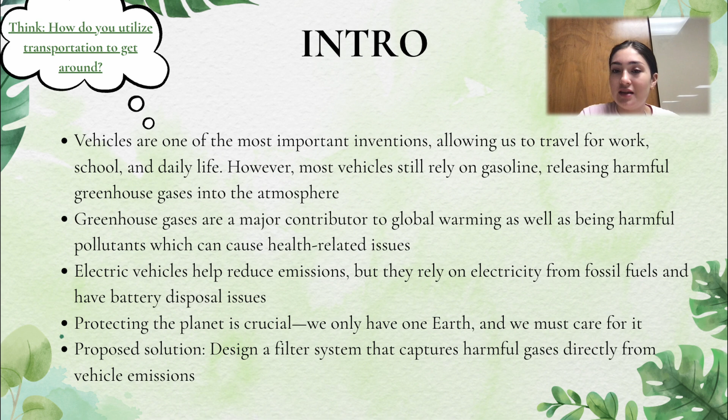Electric vehicles have been introduced to help solve this issue, as a cleaner alternative since they don't produce tailpipe emissions, but they still have drawbacks. The electricity they use often comes from fossil fuel based sources, and their batteries are often difficult to dispose of safely and sustainably. This makes it clear that while we rely on vehicles, their environmental impact is still a serious concern, which is why we propose a new solution: filters that can be added to vehicles to reduce the harmful gases they emit. This innovation could help us take a step forward in protecting the only planet that we have.

Now we are going to talk about the problem. While researching for the project, I found that one of the biggest problems is vehicle emission. Vehicle emission releases some of the most harmful pollutants in the air. These pollutants are not only damaging the environment, they also have a serious impact on public health. The problem is getting worse day by day because of poor fuel combustion, outdated filters, limited filtration surface area, and a lack of real-time maintenance alerts.

Because of harmful gases like carbon monoxide, nitrogen oxide, and many other particles, they're harmful for the environment, they're released into the environment, and no one seems to care. This is worst for the environment and for every human being, but no one literally cares, to be honest. These things lead to breathing problems, heart issues, and overall worse air quality. That's why me and Alyssa decided to focus on a solution that can directly help and improve air quality. We want to create a filter system that reduces pollutant exposure, so that public health will be safer.

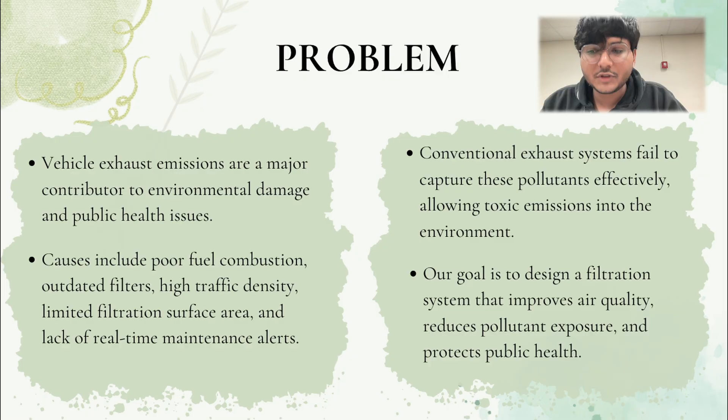Here are some problems with our current solutions. First, we have electric vehicles. While electric cars are often seen as an eco-friendly alternative to gas powered vehicles, they still have environmental drawbacks. One major concern is the production of their batteries, these batteries require rare metals like lithium and cobalt.

Mining these metals is not only resource intensive but also dangerous, especially in areas where miners work without proper safety gear. Additionally, building an electric vehicle produces about the same amount of CO2 as a gas powered one. On top of that, you have to factor in the emissions from making the battery, which is also very dangerous. And while electric vehicles themselves don't release emissions while driving, they still rely on electricity, which often comes from fossil fuels like coal or natural gas.

This means that electric cars are only as green as the energy they're charged from. If electricity comes from renewable sources like solar panels, they're a much better option. Not all people have them though, so the environmental benefit can be very limited.

Second is utilizing walking and biking. While they're often viewed as great alternatives to driving, particularly for shorter trips, they're affordable, reduce pollution, and help improve physical health. For shorter distances, whether commuting to work, school, or grabbing groceries, walking and biking could be efficient. However, for longer distances, traveling with children, walking and biking can be a lot less practical or feasible. It's also less comfortable for families with small children and carrying lots of items, or for those with limited physical mobility.

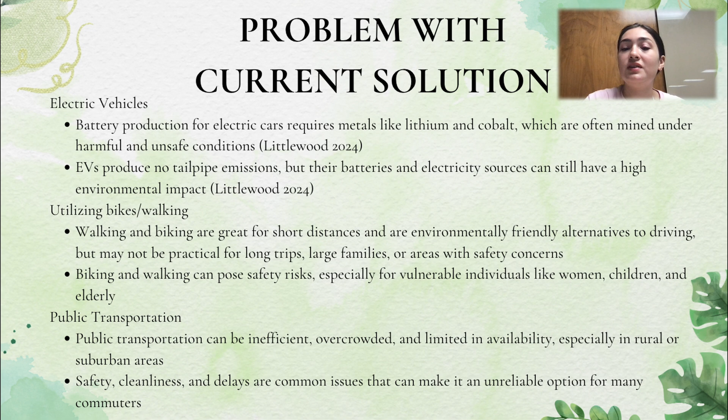Additionally, issues like safety, cleanliness, and frequent delays can make public transportation a lot less appealing. People may feel uncomfortable or unsafe, particularly during later hours or in poorly maintained vehicles. These issues can reduce the effectiveness of public transportation as a viable solution for many commuters.

Our main goal is to reduce the pollution that comes directly from vehicles. We are making a small filter that is inspired by how lungs work. This filter has different kinds of layers that can catch, capture, and chemically trap harmful gases to clean them. We are also going to add a self-cleaning system and a sensor. This helps the filter last longer and ensures it works properly. Our design is small, easy to install, and works with most cars. By using ideas from nature, we are making sure we can clean the air in a smart way.

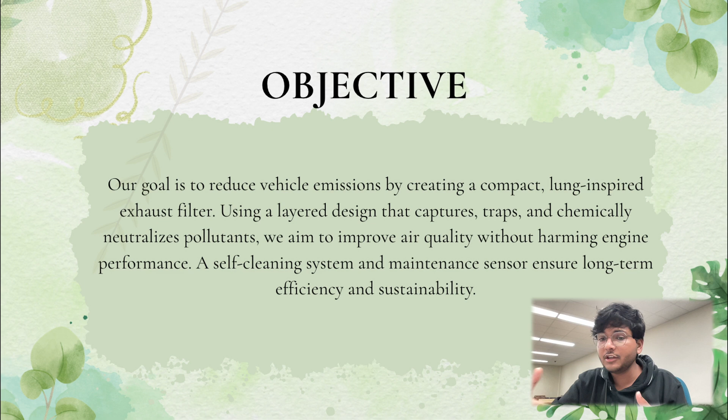The biological questions we're going to be considering when researching this project are: How does nature filter and remove harmful gases in the atmosphere? How does nature help organisms breathe clean air through their respiratory systems? And how does nature help to create clean air?

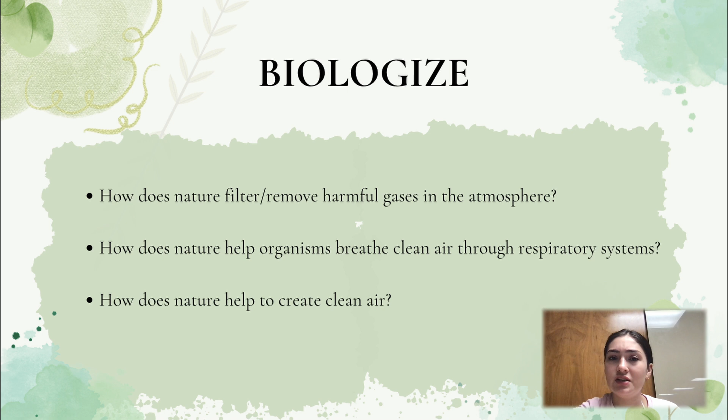For our second biological model, we chose mammal lungs because of their highly efficient natural air filtration process. Lungs clean incoming air in three important stages. First, nasal hairs at the entrance trap larger particles like dirt and dust to prevent them from entering deeper into the system. Second, inside the bronchial tubes, there are tiny hair-like structures called cilia, which move in coordinated waves to push mucus upward. This mucus traps finer pollutants and germs, carrying them out of the lungs either by coughing or swallowing. Finally, the clean air reaches the alveoli, tiny sacs where oxygen is absorbed into the body and carbon dioxide is removed.

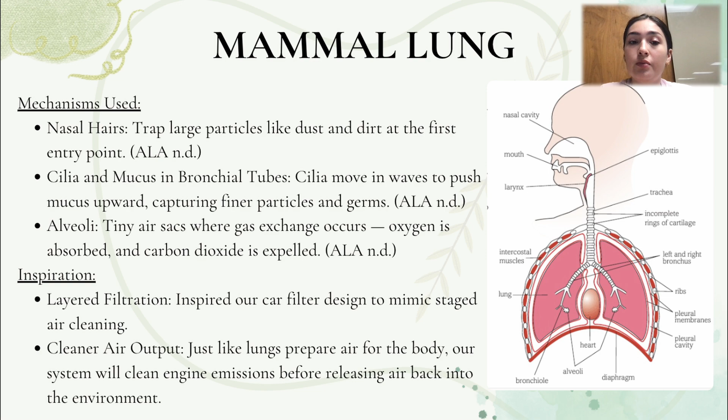We also took some inspiration from coral reefs. Corals are very good at slowing down water currents and trapping nutrients without blocking flow. In our design, when the car moves, a small plastic pellets rub inside a ceramic block. This rubbing creates static electricity, which helps us catch pollution particles that come from the exhaust. This system does not need any kind of power or fuel.

Also, the inside of the filter is made up of coral reef patterns. It has a special pattern that traps more pollutant particles without stopping the airflow. Because of the properties of the coral reef and its pattern, this helps us capture up to 93% of the particles, and 93% is a big number if we want to reduce pollution from vehicles.

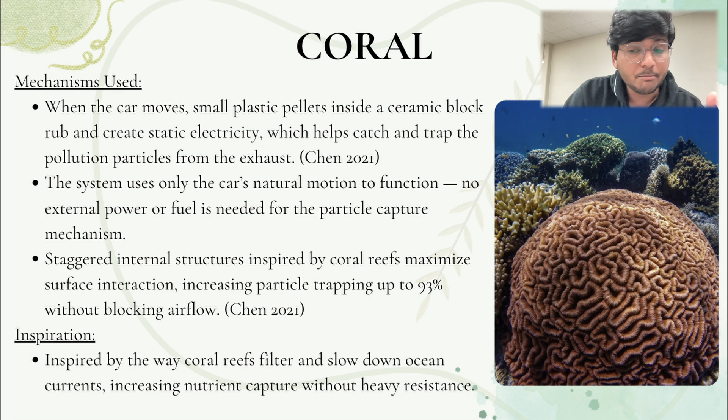For our abstract, we reframed biological strategies from mammal lungs and algae into an accessible and practical filter design. The goal was not just to mimic nature, but to create something easy for car owners to use without needing to replace their vehicles entirely.

We selected mammal lungs for their natural layered air filtration system, using nasal hairs, cilia, and alveoli to clean and exchange air efficiently. Algae were chosen as well because they naturally absorb carbon dioxide and harmful gases and produce cleaner air through their biological processes.

These models were a perfect fit for the problem of car emissions, which are a major cause of pollution in cities. Many people still heavily rely on gas powered vehicle systems, so we needed a solution that would work with existing systems instead of asking for major lifestyle changes.

We applied these ideas by creating a multi-stage modular filter that captures pollutants in layers and uses algae to biologically process exhaust gases. The final design is intended to be affordable, simple to install, and effective, helping provide cleaner air for everyone without forcing expensive changes like switching to electric vehicles.

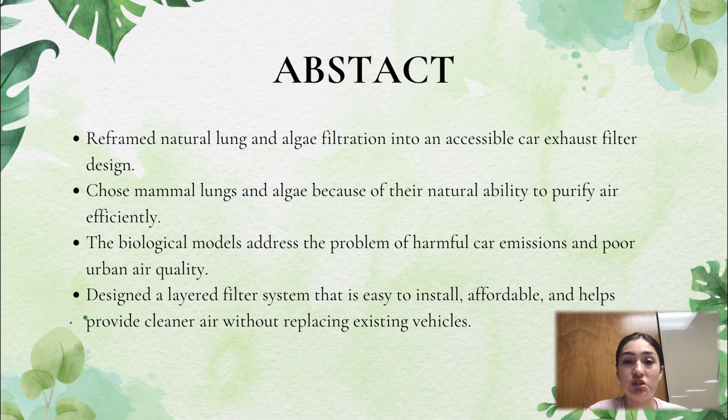After a lot of research, discussion, and debate with each other, we finally decided to choose this topic, the lung-inspired airflow system, for our final project. And I will tell you why we chose this topic for our final project.

This design copies how mammal lungs work. It uses a branching pattern to increase the surface area for filtration. At the same time, it keeps engine back pressure low, which is very important to maintaining good health and good performance for any vehicle.

Our filter uses a multi-layer system. First, it catches large particles, then it traps finer dust, and finally it cleans harmful gases like carbon monoxide, CO, and nitrogen oxide. We also added an algae based idea to promote natural gas exchange and make the system more eco-friendly.

As an engineering student, I can say that our system focuses on three key aspects: first is high filtration efficiency, second is low energy loss, and the third is easy integration into real vehicles. We made sure that this system will be compact, modular, and strong.

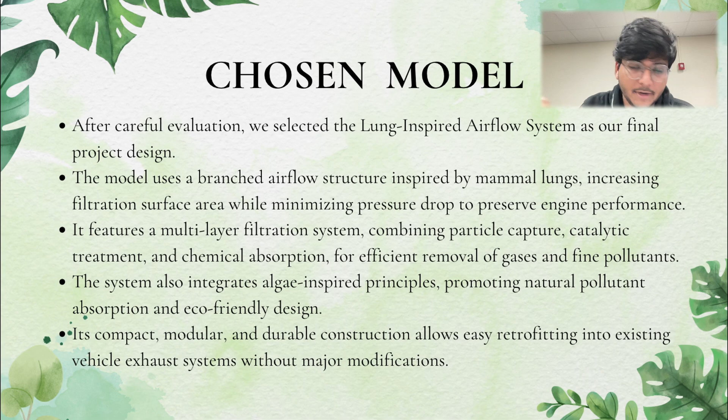The best thing about this project is it can easily fit into that old, previous exhaust system. They don't need to buy a new exhaust system. It's easy. They just have to put a filter into the exhaust system with a few small changes, and it will work out. For our model prototype 1, I designed a mammal lung inspired filter that focused on three biological stages: trapping large particles, removing finer pollutants, and chemically absorbing harmful gases.

While the filtration was effective, the first model had its challenges. It was bulky and hard to install on different types of vehicles, and needed too much space and extra adjustments on the system. After getting feedback, we worked on making the design slimmer, more modular, and allowing it to easily attach to a wider range of car exhausts without interfering with car performance.

We also decided to use lighter, more durable materials so the filter wouldn't weigh down or overwork the exhaust system. Another major upgrade we would add is self-cleaning features, like vibrations or air pulses inspired by how cilia naturally clean our lungs.

Additionally, we planned on enhancing our system by introducing algae tubes. These transparent tubes house algae that chemically consume the CO2, nitrogen oxide, and particulates, adding a second biological cleaning stage. The algae system is lightweight and can be visually monitored through clear tubing, making maintenance simple and encouraging continuous filtration. Overall, the project will hopefully evolve from a heavy-duty biological filter into a more compact, sustainable model that could realistically be adapted into cars today without harming vehicle function.

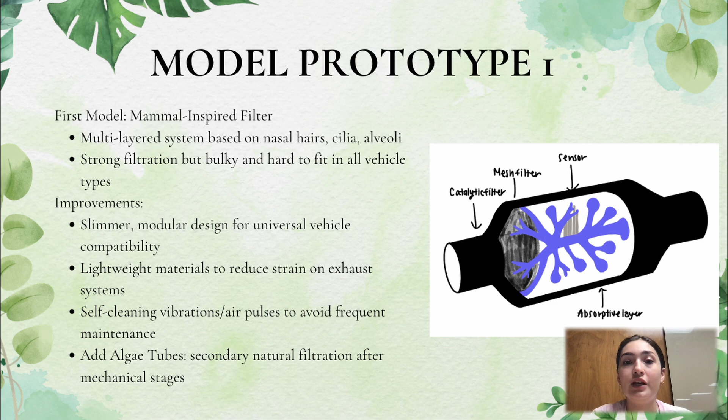It's my turn now. I will talk about model prototype 2. This design used a three-layer filtration system.

First, it catches big particles. Second, because of the catalyst layer, it helps break down harmful gases that come from the exhaust. Third, all the leftover pollutants and particles are captured by another layer.

To make it more advanced, we added a vibration motor. This motor gently shakes the system so it won't get clogged easily, helping keep it clean for a longer period of time.

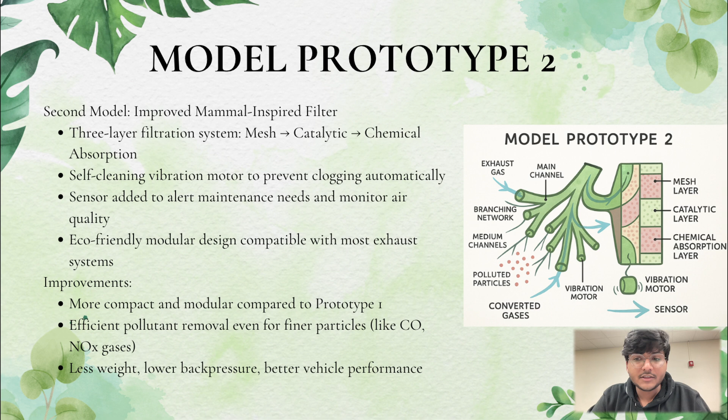We also added a sensor to check the air quality. Whenever air quality is bad for that exhaust system, the sensor notifies the owner of the car or vehicle. We also focused on making the design more compact, smarter, and better looking for the vehicle.

Now, for our final model, we created the Green Lung Filter, a bio-inspired exhaust system designed to reduce harmful vehicle emissions. It works by mimicking the natural filtration process of mammal lungs and an algae system.

First, the exhaust enters through a nasal hair-like layer that traps larger pollutants like dirt and soot. Then it moves into a cilia and mucus-inspired layer, which captures finer particles and toxic chemicals. Next, the gases pass through an alveoli-like structure, where harmful gases like carbon monoxide and nitrogen oxides are separated.

Finally, the exhaust moves into an algae culture section, where live algae absorb CO2 and nitrogen oxides, using them as nutrients and releasing cleaner air, mostly oxygen and other harmless byproducts.

This filter is designed to easily attach to existing exhaust pipes. It uses adjustable clamps and brackets that securely lock into place without requiring major modifications, making it universal for most cars, trucks, and SUVs.

In terms of manufacturing, the filter would use lightweight materials, heat-resistant plastics, and low-maintenance algae tubes. These are affordable, widely available materials that make mass production cost-effective while also being durable enough for real-world driving conditions.

Overall, the Green Lung Filter offers a practical and sustainable solution to help fight air pollution without forcing people to buy new vehicles or switch fuel types. It's a way to improve what people already have, helping both the environment and public health.

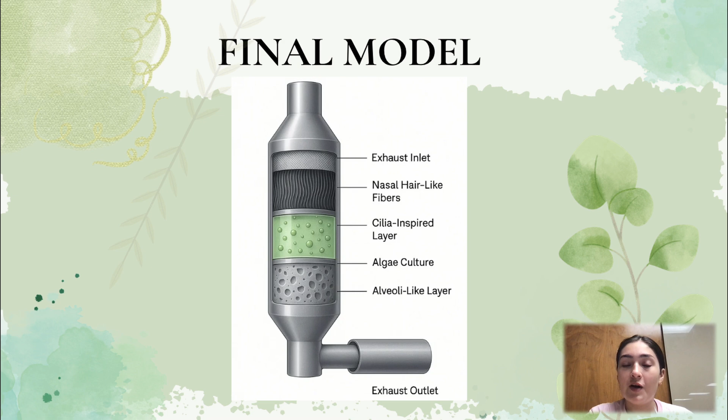Now I'm going to talk about problems and solutions: what problems we faced, what challenges we had doing that research, and what solutions we found.

The first problem we faced was that we needed some kind of system or prototype design that can fit into the exhaust without harming it or decreasing the performance of the exhaust or vehicle overall. The solution we found is that our system uses a lung-inspired branching airflow system. It gives us more surface area to clean the system while keeping the engine running smoothly without harming the exhaust or anything else.

The second important problem we faced while making this prototype is that the filter can get clogged over time. To tackle this, we added a vibration motor and a sensor. Because of these, the filter stays clean longer, and if it gets close to clogging, the sensor notifies and alerts the driver when maintenance is needed.

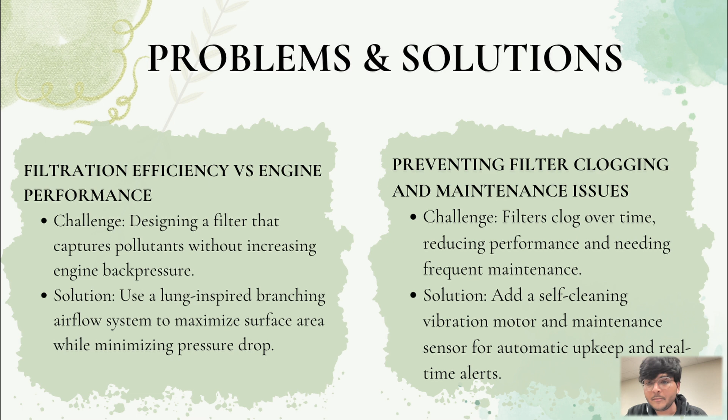The best thing about this project is that it is not expensive at all. It was challenging for us to figure out how to reduce the cost of this prototype, but we found a way. We knew from the first day that if the system was too expensive, no one would purchase it, so we made a lightweight modular fit.

It is not expensive because we are just using natural materials, like basic steel, and inside that we use some basic carbon and layering of coral-like things.

The fourth problem we faced is that we are trying to solve a nature problem. We want to make sure our system is eco-friendly. Nowadays, many filters are made from harmful materials, so we use eco-friendly materials in this design, like ideas from algae and coral leaves, to reduce environmental impact.

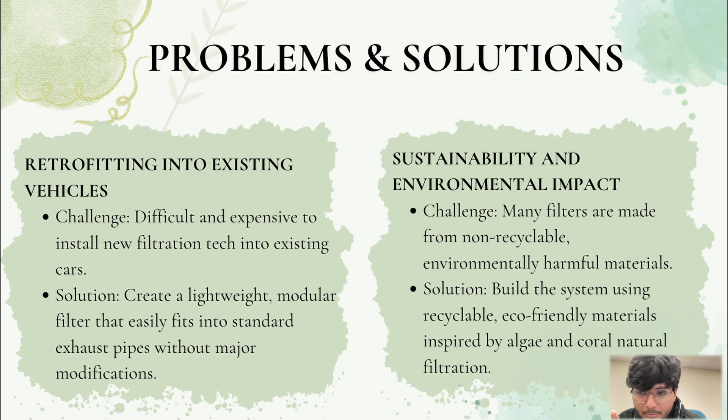For our evaluation, our Green Lung Filter is classified as a system that combines elements of form and process. It's modeled after mammal lungs and algae's natural ability to purify air. The design successfully addresses the challenge by reducing harmful emissions such as CO2, nitrous oxides, and other particulate matter without affecting the car's performance.

Some of the problems identified include the filter being somewhat bulky and visible on people's vehicles, which may not be appealing to some customers concerned with their car's appearance. Moving forward, we would make the design sleeker, more compact, and come in possibly different styles or colors to blend in better.

In terms of technical feasibility, the design uses existing affordable technologies like modular attachment and eco-friendly materials, making it realistic to produce. From a business perspective, our target is to make it affordable and adaptable for all vehicles to reach a broader market to all car users.

For environmental sustainability and ethical impact are strong positives. By cleaning exhaust without forcing consumers to completely abandon gas powered cars, we address real world habits and make eco-friendly changes more accessible to everyone. Compared to other industry solutions like catalytic converters, our filter enhances vehicle systems instead of requiring a complete system overhaul.

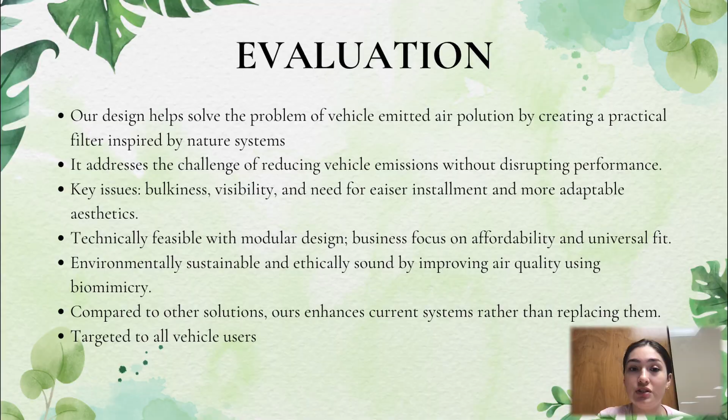Our design is both focused on sustainability and ethics. First, our bioinspired airflow system reduces harmful emissions without creating any chemical byproducts. We also make sure that our overall system uses less amount of energy.

It works with a small vibration motor, so it does not need any extra power. This makes it very energy efficient. Another important part of our project is that it's very cheap. Yeah, we can say that.

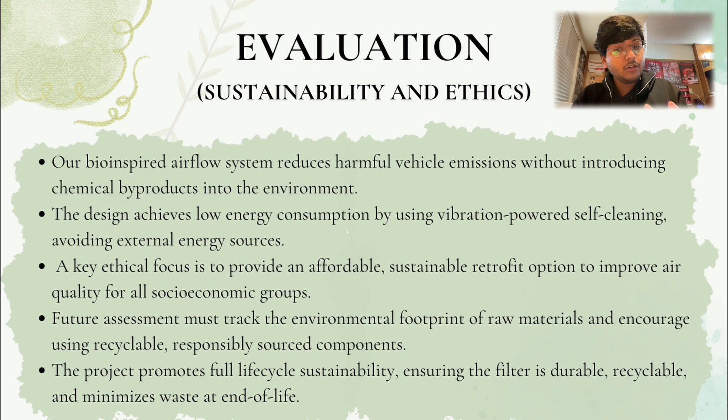We want to make clean air technology that can be used by all people. We know it's important to check all the environmental impact. Our aim is to build a system that is durable, recyclable, and causes minimum waste when it reaches the end of its life.

Now for a comparison with other solutions. First, we have electric vehicles. Compared to electric vehicles, our system is a lot more accessible because it doesn't require buying an entirely new car, which is expensive and impractical on its own for many people. Electric vehicles also rely on mining for batteries, which can cause its own environmental damage. Also, EVs aren't completely non gas powered; they are only as green as their power source.

Second, we have public transportation. Compared to public transportation, our filter supports personal convenience. Public transportation isn't available everywhere and it may not suit people's schedules or locations, while our system lets people keep their independence.

And lastly, we have walking and biking. Compared to walking and biking, our design fits into existing habits. While it is eco friendly, these options aren't always realistic for people with long commutes, disabilities, or certain climate situations.

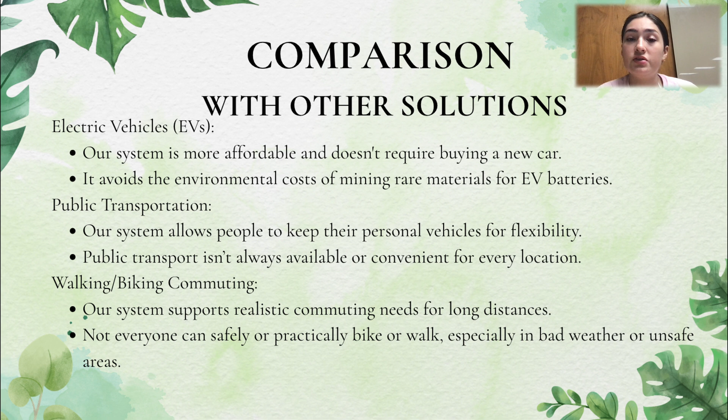Now, this is the time we are going to talk about future direction, what we can do in the future, what we are planning to do. After finishing the design, the next step is to test and build it, and get feedback from normal people on that prototype.

We want to carefully study how the airflow moves inside the tube or tunnel, and measure how much pressure it creates and how much wind it takes. We have to run tests and get feedback from people, like finding out how efficient the prototype is at removing carbon dioxide, nitrogen oxides, and other particles from the vehicle.

During the testing we also have to check how durable it is. We will check how efficient that filter is, I mean how long it can work without breaking or needing cleaning. We also have to check how that self-cleaning mechanism actually works.

After completing all these basic things, we are going to move to the next level, which will be making the vibration motor and sensor more efficient. The final thing is that we just want to make it more efficient and more friendly to the people and to nature.

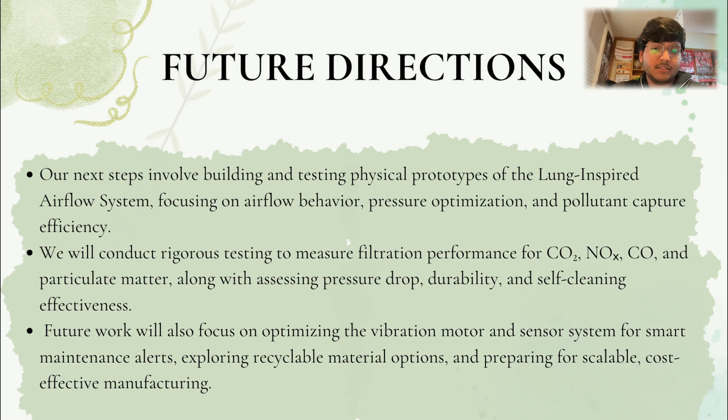Now, lastly, why is this bioinspired? Our filter copies exactly how mammal lungs work, trapping larger pollutants first, finer particles next, and gases are absorbed last. Each layer is based on the existing lung system.

We also use algae to naturally absorb CO2 and nitrogen oxides, which turn harmful gases into clean air. It's a living, breathing system inspired by nature. Just like ecosystems, our filter works on its own without constant maintenance. The algae grow by feeding on pollutants, keeping the system efficient.

For nature's efficiency, our design uses no extra energy; the exhaust flow alone powers it. Plus, instead of creating more waste, we turn pollution into something useful for algae growth.

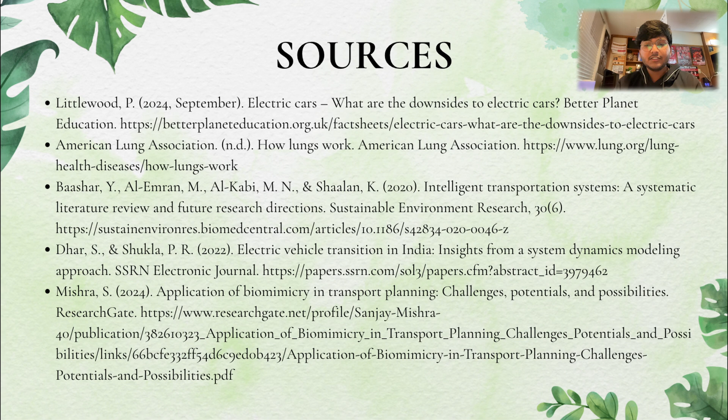And here we just cited all the sources we used to find out and do our research.